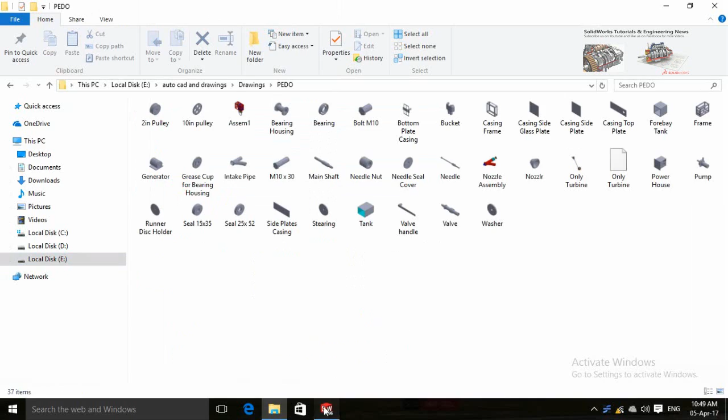Let's start by pressing new and then starting from assembly. In the meanwhile, open that folder which contains the parts for the jet assembly. You can get this folder by sending me a message on my Facebook page. Close this dialog, and drop the parts from this folder into SolidWorks assembly.

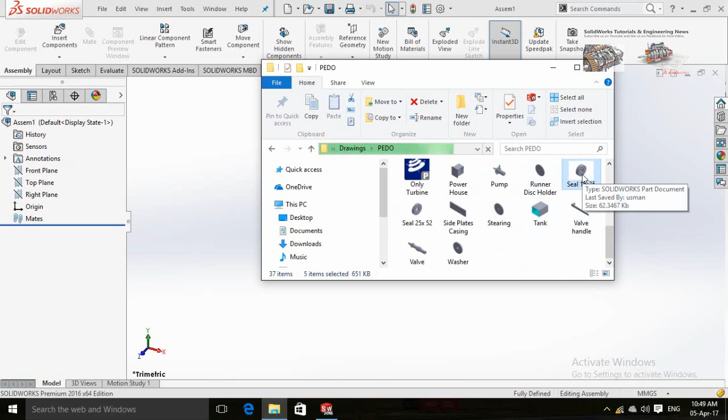Now drag them away from each other. This part is not moving, so right click on it and select float.

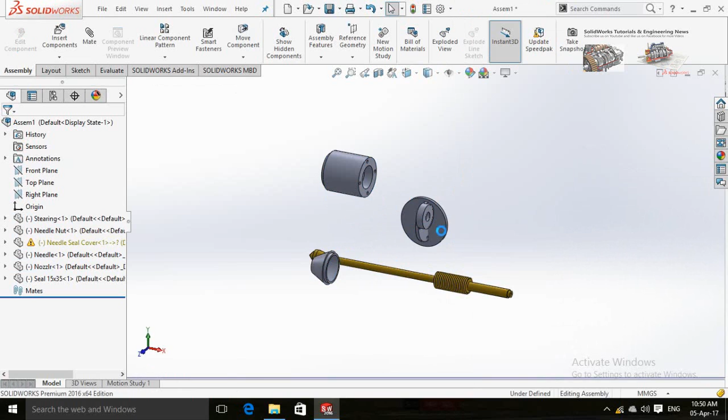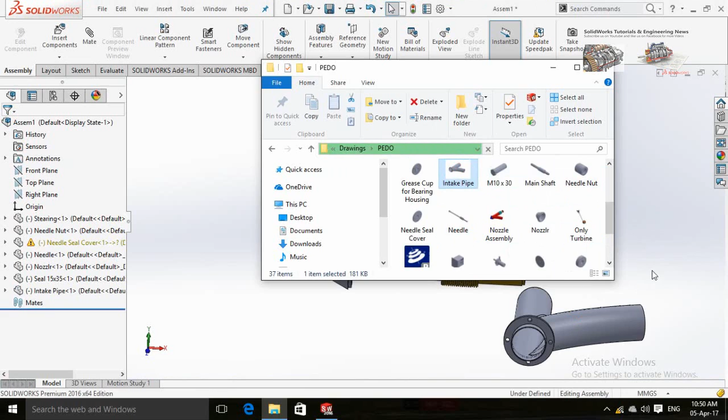Now import the jet casing named as intake pipe. Click on the shaft and select mate. Now click on this face of the intake pipe, and change the direction.

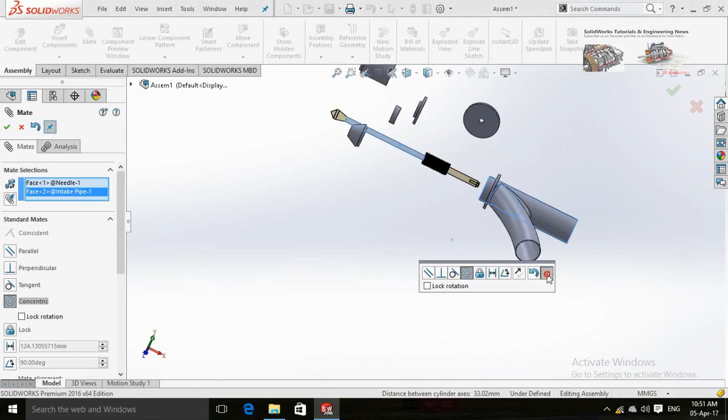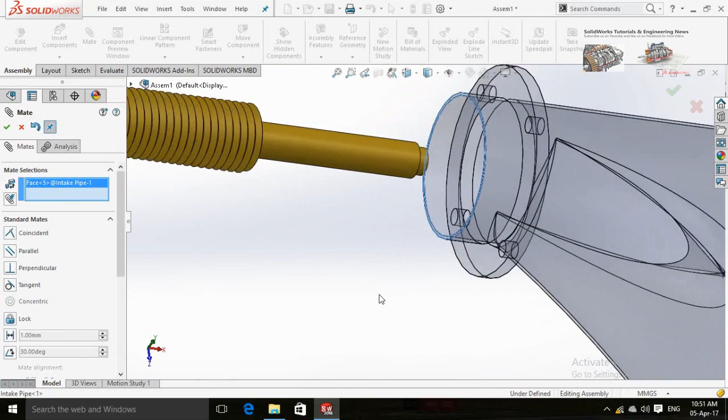Now mate this nozzle with the intake pipe. Assemble this needle nut with the intake pipe.

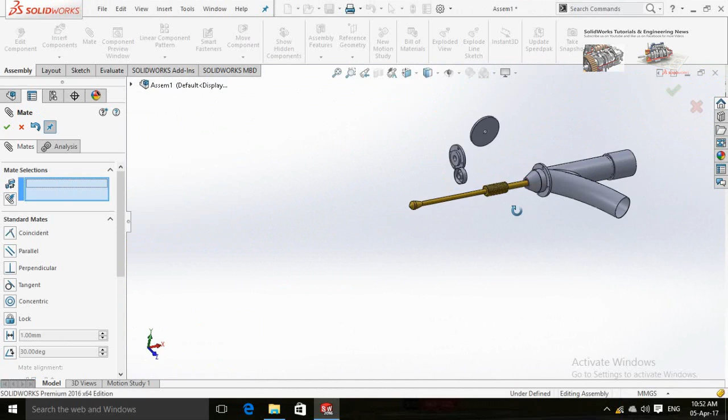This is the water seal, so assemble it with the needle nut. Change the direction of the seal. This is the accurate direction of the seal.

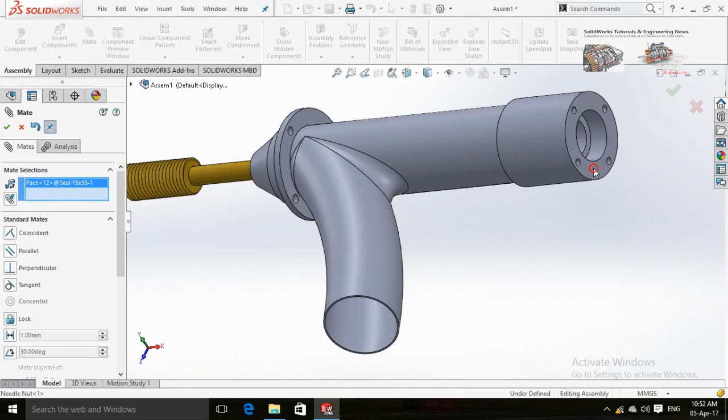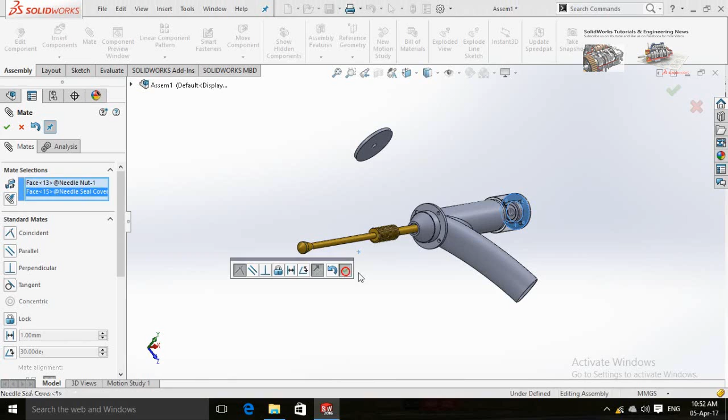Now assemble this needle cover on top of the needle nut. Now create mates for the handle on top of the needle. Lock its rotation.

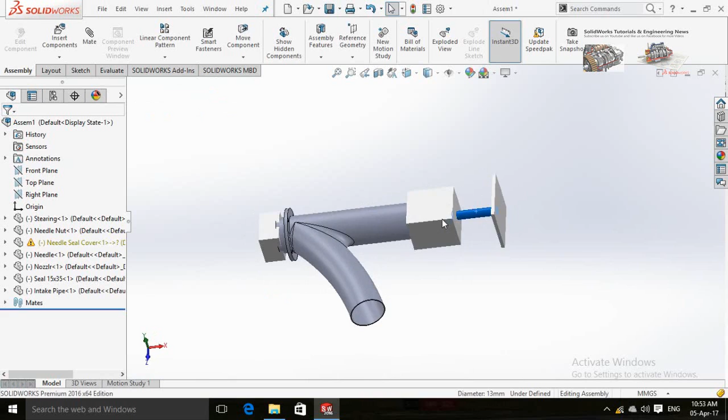Now right click on the intake pipe and fix it. Hide this intake pipe to create a screw mate for the needle and needle nut.

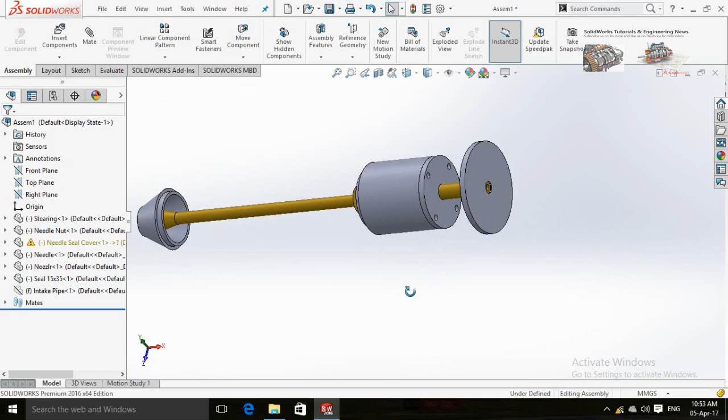Now click on the needle and open it. Here click on reference geometry and select axis. Now click on this face and then press OK button. Close this window and click on yes.

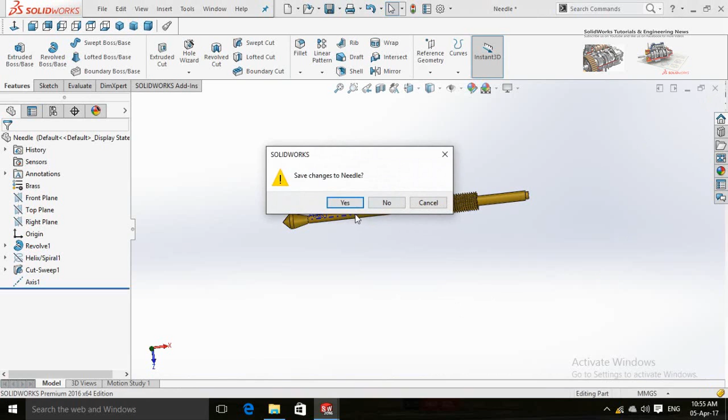Select mates and then in the mechanical mates select screw. Scroll down from this arrow. In the needle part select axis.

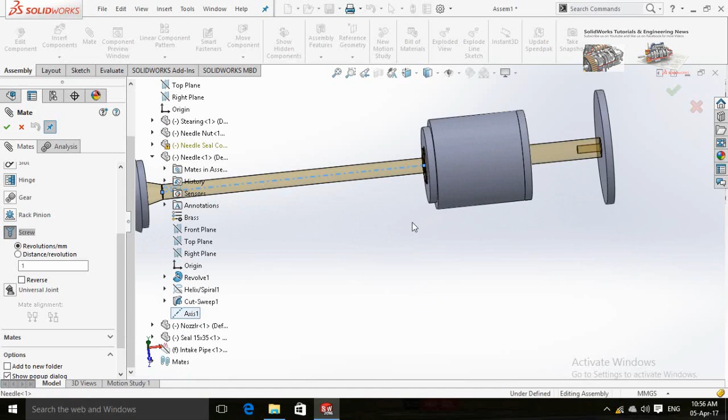Now click on this circular edge of the needle nut. Check into this box the distance per revolution, and the distance is 10 mm. Now press OK.

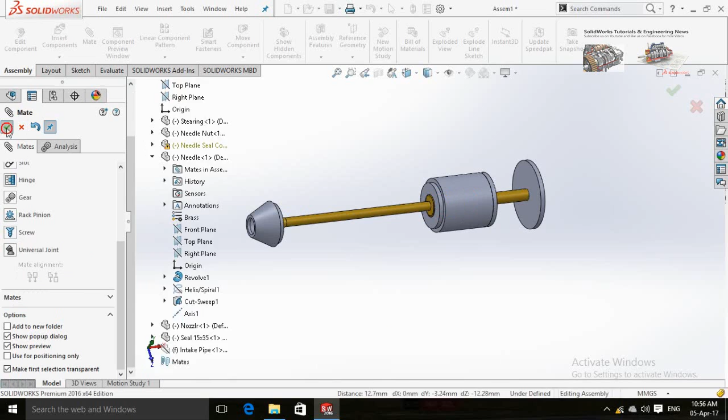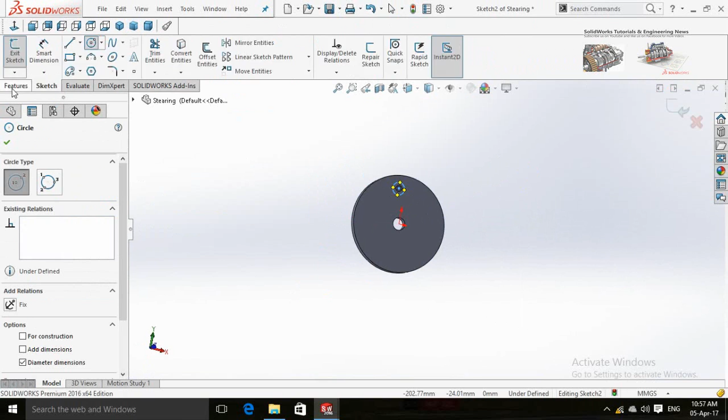It is difficult to observe the rotation of the needle, so click on the needle handle and open it. Click on this face and then select new sketch. Make a circle, and then in the feature click on extruded cut command.

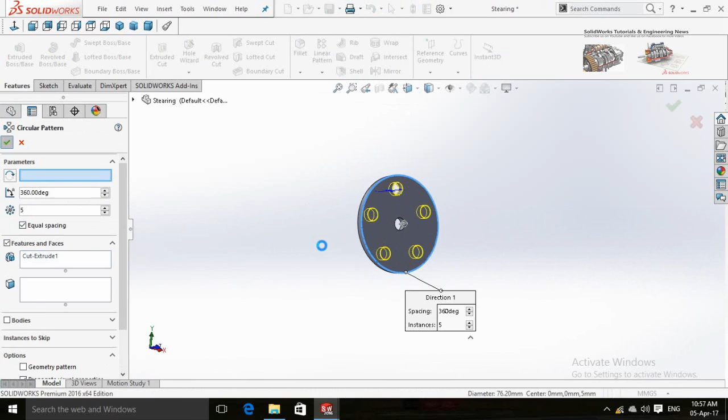Now circular pattern, and the quantity is 5. Close this window and click yes.

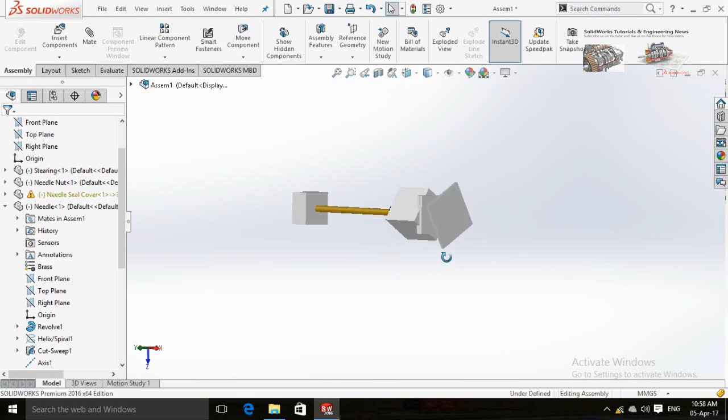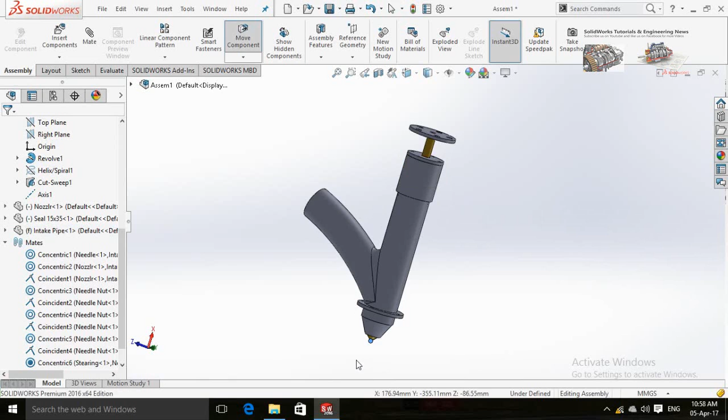Unhide the intake pipe from this bar. To make an exploded view of the jet assembly, click on Configuration Manager from here, then right click on Default and select New Exploded View. Drag the parts one by one.

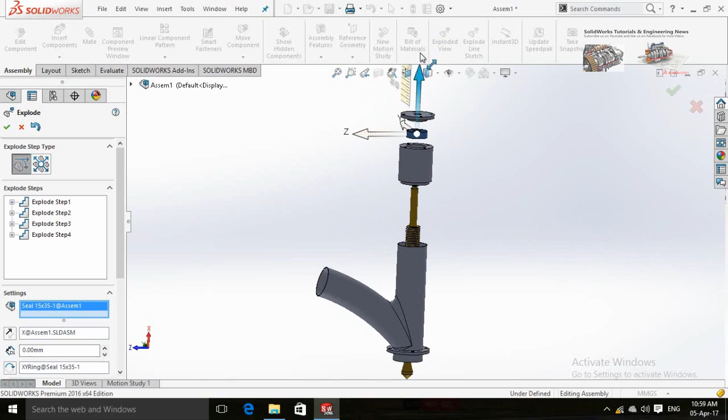Now press OK button. Click on this arrow, then right click on Exploded View 1 and select Animate Collapse. Stop it from here and close the dialog.

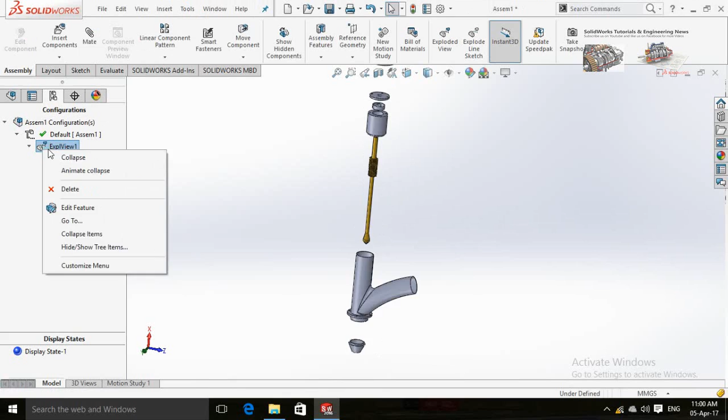If you double click on the exploded view, the assembly will explode or collapse. Now animate explode.